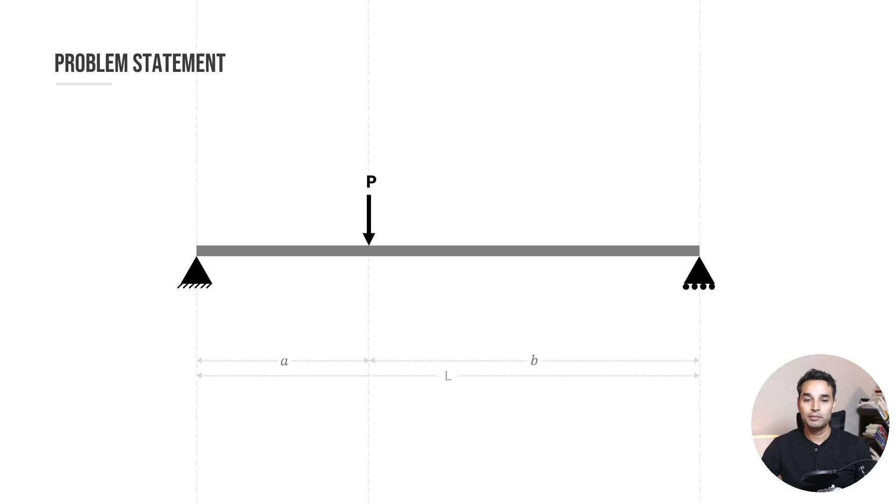So this is going to be our problem statement. We have a beam with a span length of L. We have a pin support on the left side, a roller support on the right side, and we have a point load P at a distance of A from the left side. Let's try to solve it.

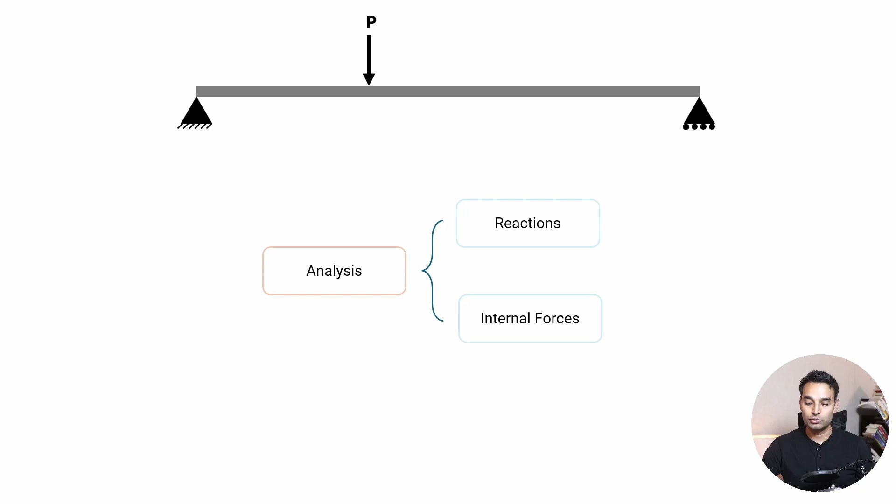So when we say we are going to be solving it, what we actually mean is that we are going to be analyzing it. And what we mean by analyzing is that we are going to be finding the reactions and the internal forces. In this case, I'm not going into the internal stresses -- that would be a separate topic. For now, we are just going into the reactions and the internal forces. And for the internal forces, we are going to be finding the shear forces and the bending moments at all the locations, which essentially is the shear force diagram and the bending moment diagram.

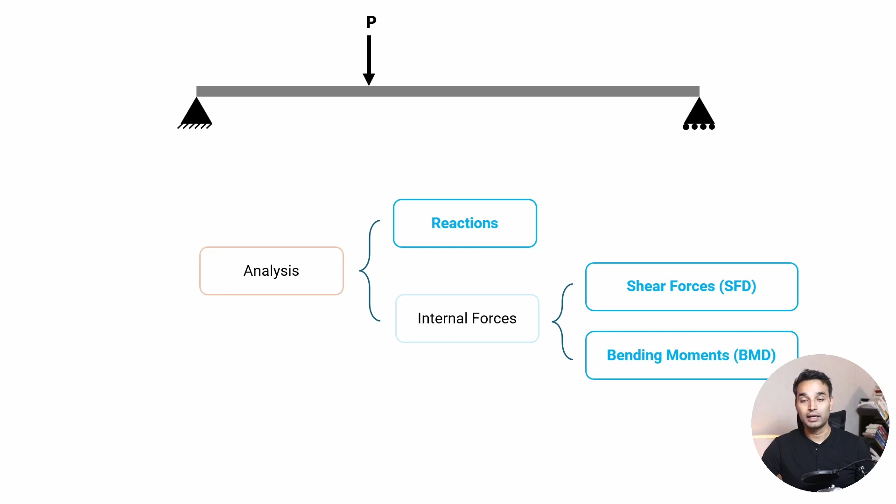Our primary focus for this video is going to be finding all these three things, that is the reactions, the shear forces, and the bending moments, and the diagrams of each. So let's start off with these.

Now, to start off with finding all these, we have to first find out the degree of statical indeterminacy, which is also called the structural redundancy. Now, this can either be 0, which would mean that it is a statically determinate structure, or it can be greater than 0, which would mean that it is a statically indeterminate structure.

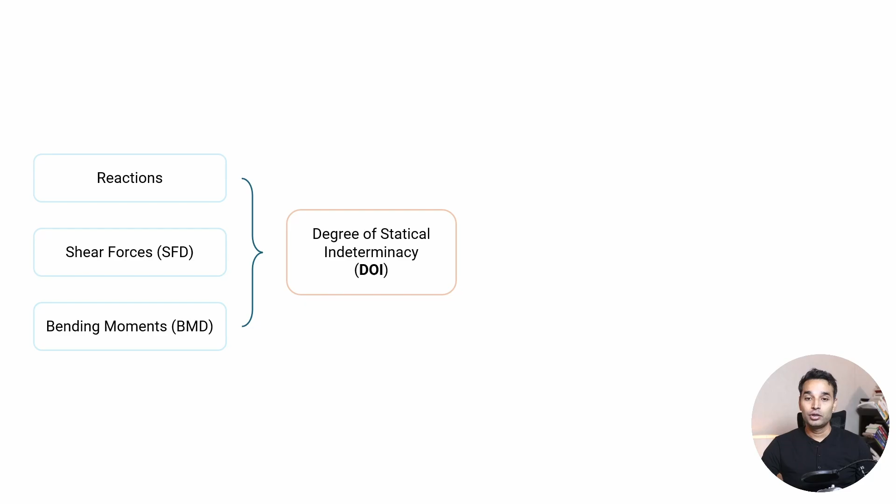To find the degree of indeterminacy, we simply have to find the unknowns and subtract knowns from it. Now, the unknowns would mean the reactions, and the knowns would mean the equations of static equilibrium. Now, this equations of static equilibrium for a beam would be dependent upon the force system.

In this case, we are assuming that it is a coplanar parallel force system. What that essentially means is that all the loading is going to be downwards and in just this y and x axis. So this z axis is gone, hence the word coplanar and parallel, because we assume that only the loads are acting downwards. Now, this is an assumption that there are going to be no inclined loads, and generally in a beam, we only consider loads which are acting from the top. If we have a frame, we would have considered loads from different directions. But in general, for a beam, we consider that the loads are acting right at the top, that is just in the negative y direction or in the positive y direction for that matter. Hence, it is called a coplanar parallel force system.

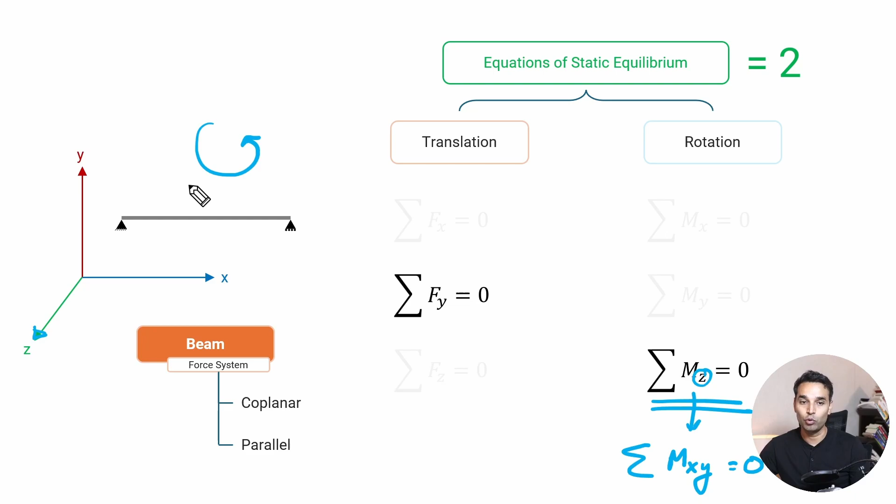Because of that, what we get is that we end up only with 2 equations of equilibrium instead of all the 6. Now, the Fy equals 0 means that the structure is static. It cannot move in this direction. Hence, all the forces in this direction, this y direction, is going to be 0. Mz being 0 means that this structure cannot rotate in this direction. So this is going to be Mz, that is pointing outward. So if you use the right hand thumb rule, we can see that this Mz is nothing but Mxy. So we are going to be finding Mxy equals 0 just for the fact that it cannot rotate along this plane. So we now have 2 equations of equilibrium.

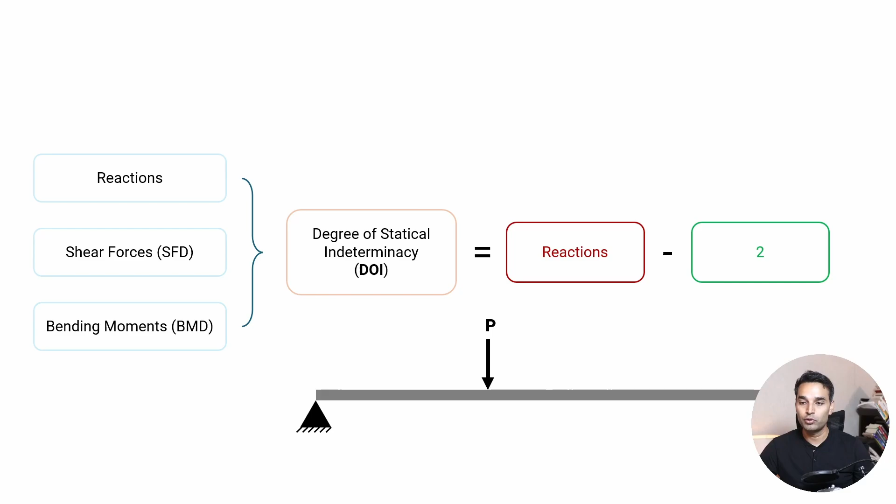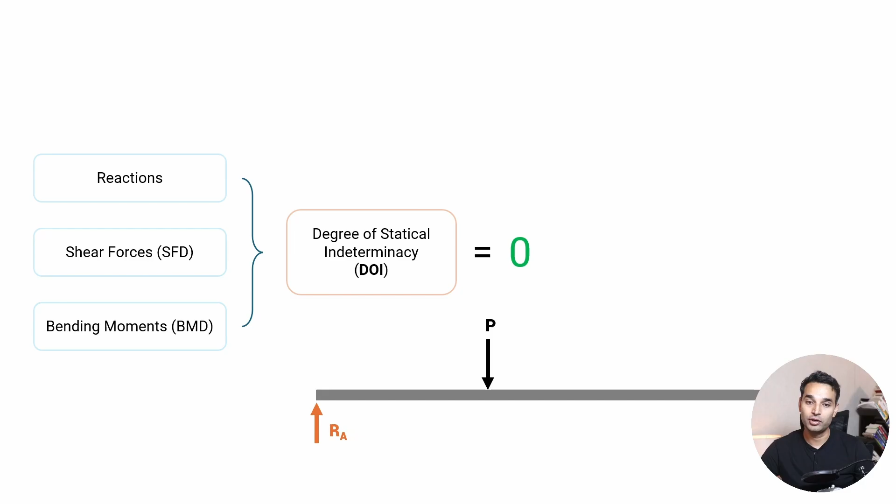Let's move ahead. So we can just fill in the equations of equilibrium. Now, for the reactions part, we can simply change the pin support and the roller support with reactions. Again, we are not going to be taking the component of this direction because we are assuming it to be a coplanar parallel force system. So in this case, we are just left with 2 reactions. So all in all, we get 2 reactions as well as 2 equations of equilibrium, thereby giving us a statical indeterminacy degree of 0, which essentially means that it is going to be a statically determinate structure.

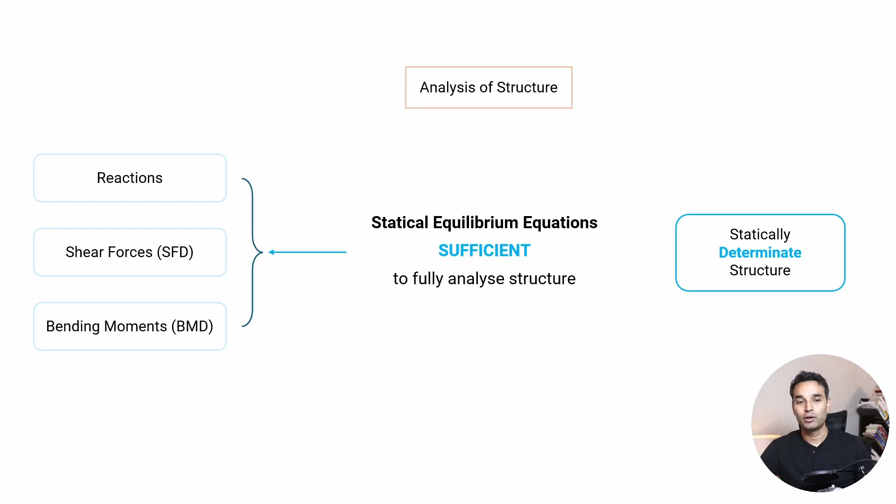Now, quickly, I'll talk about what a statically determinate structure does. For a statically determinate structure, if we are talking about the analysis of the structure, we can use just the static equilibrium equations to fully analyze the structure. This is not possible in statically indeterminate structure. Right now, we are going to be using just the equations of static equilibrium to find out everything there is to know about reactions, shear forces, and bending moments.

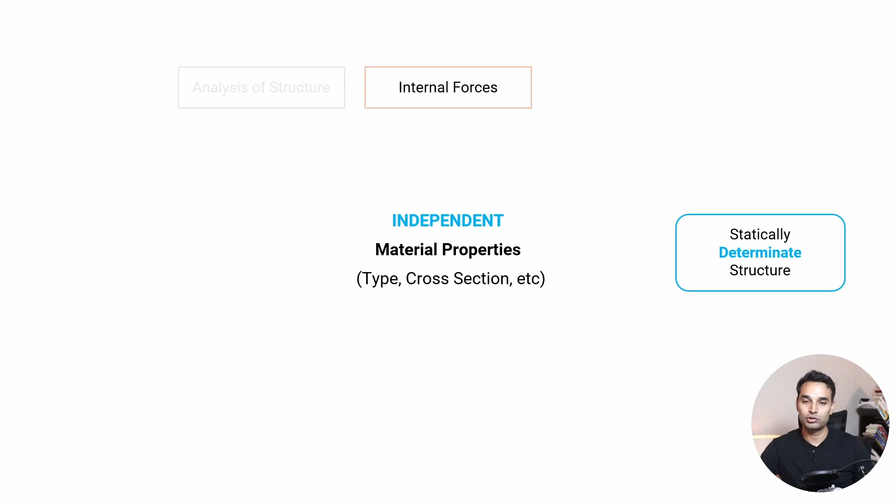Now, when it comes to the internal forces, we also know that for a statically determinate structure, the internal forces, not the stresses, are going to be independent of the material property. That is, the shear forces and bending moments which we calculate at different cross sections will be independent of the cross section or the material type itself.

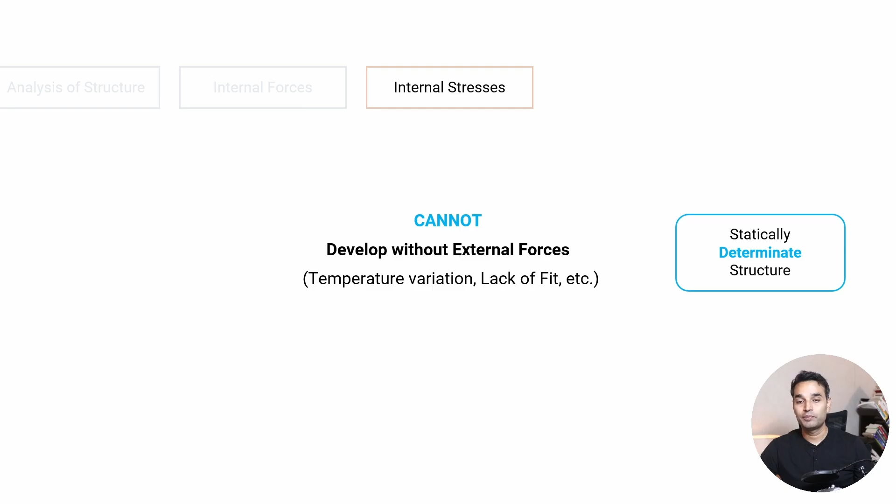Finally, for a statically determined structure, no internal stresses can be developed without having external forces, which is not the case in a statically indeterminate structure, where just due to a change of temperature, internal stresses can develop. For a determined structure, this is not the case.

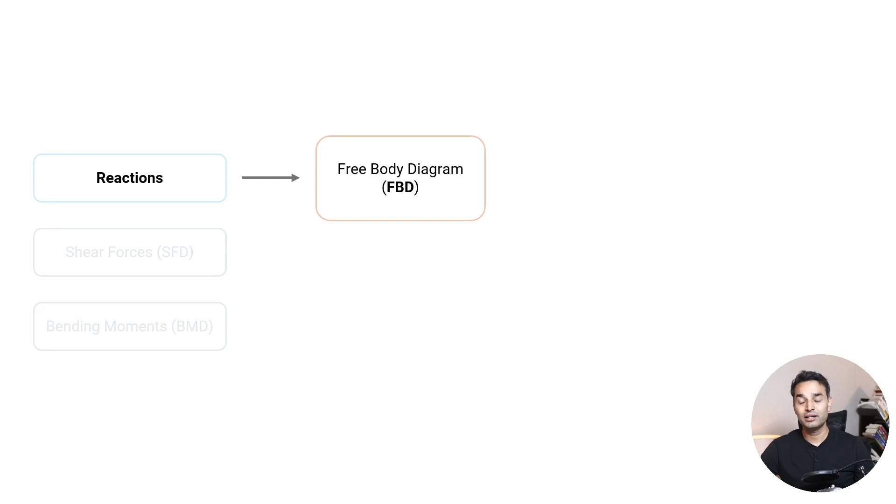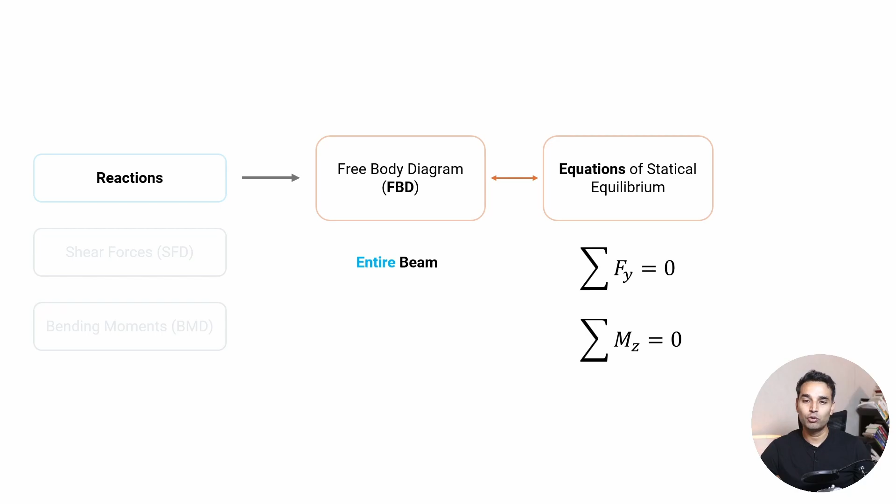So now that we know about the degree of indeterminacy, let's go ahead and start solving for the reactions. For the reactions, we'll first need a free body diagram for the entire beam. We'll also need the equations of static equilibrium, Fy and Mz equal to 0, and use these to find out the reactions for the entire beam.

So let's start off with the free body diagram. This is going to be our actual structure. We have to first convert it into a free body.

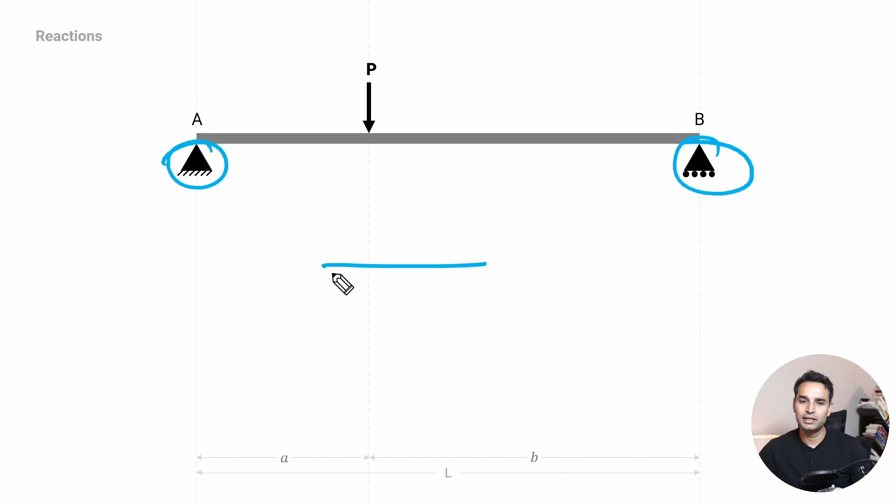What that essentially means is that we have to get rid of these supports and change it to a force system. A free body is only represented by forces at different locations, nothing of supports. So we have to get rid of the supports. Now we cannot actually get rid of the supports, but rather replace them with some kind of forces.

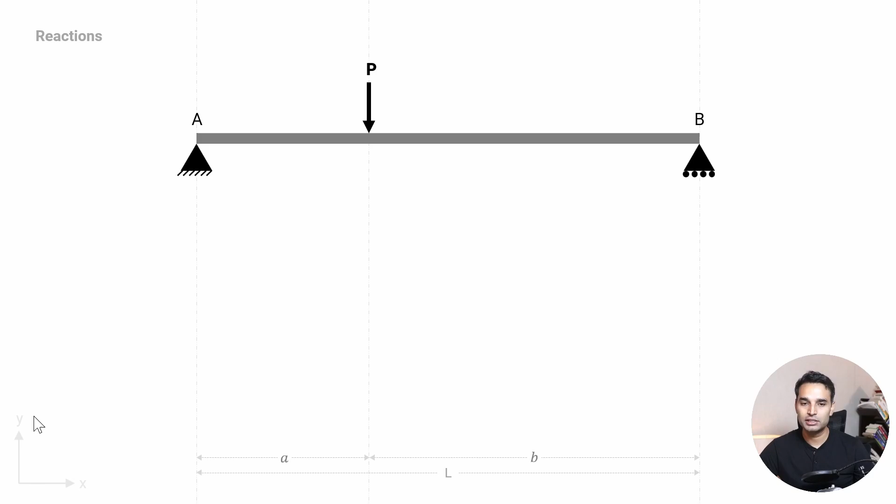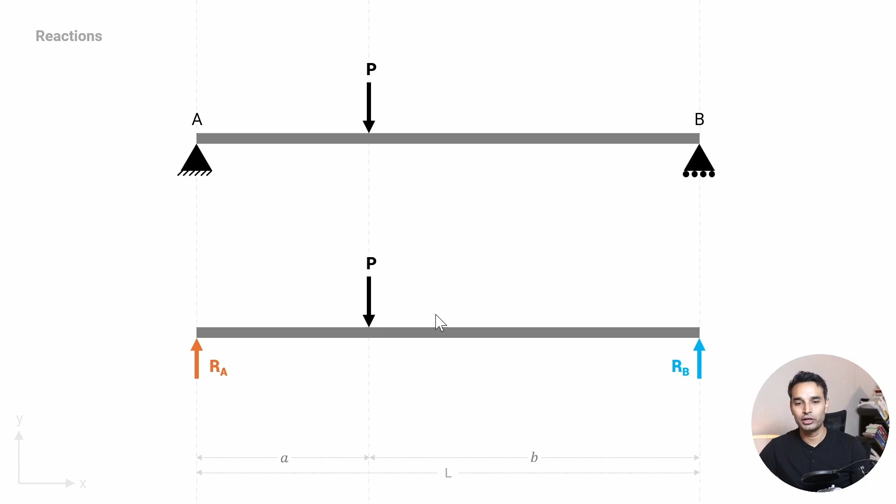In this case, the forces are going to be RA and RB. We are assuming that our left point is A and the right point is B, hence the reactions. So now this, what we are seeing right now, is the free body diagram for the entire beam.

Let's try to solve it. We'll use the first equation of equilibrium, that is sigma Fy equals to 0, which essentially means that the structure is not moving in the y direction. We have a parallel force system and a coplanar force system, so we are not moving up and down in the y direction. Hence all the forces have to come out to be 0.

So if we solve it, we get RA, which is moving upwards. We take the upward force as positive. So RA in the positive direction, RB in the positive direction, minus P pointing downwards. The summation of this is going to be 0, which essentially means RA plus RB equals to P.

Let's keep this value aside. Let's try to use the other equation of equilibrium, which is Mz equals 0. Now, when we are trying to find the Mz at any point, this should be considered at any point on the plane in xy. We did not do that for Fy.

That was just because Fy is a directional thing. Mz would be taken around a certain point. Now we can take the value of Mz at any point. So we can consider the rotation of the structure at, say, this point. This structure should not be rotating at this point.

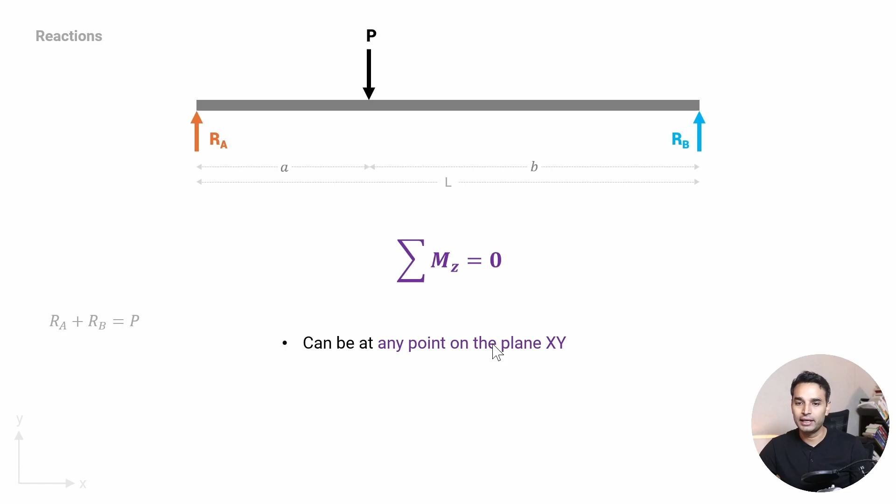The structure should not be rotating at this point. What we essentially mean is that the structure is not rotating. Now, when we talk about rotation, we talk about rotation with respect to a point. So in this case, we can take any point on the plane xy and the Mz should be 0.

Because the structure is static. Now, to make our calculations easier, we check the bending moments at support nodes, because that minimizes the calculation by one extra step. So if we are trying to find out the moment at this point, for example, we'll be using this RA value multiplied by this lever arm, this P value multiplied by this lever arm, and this RB multiplied by this lever arm.

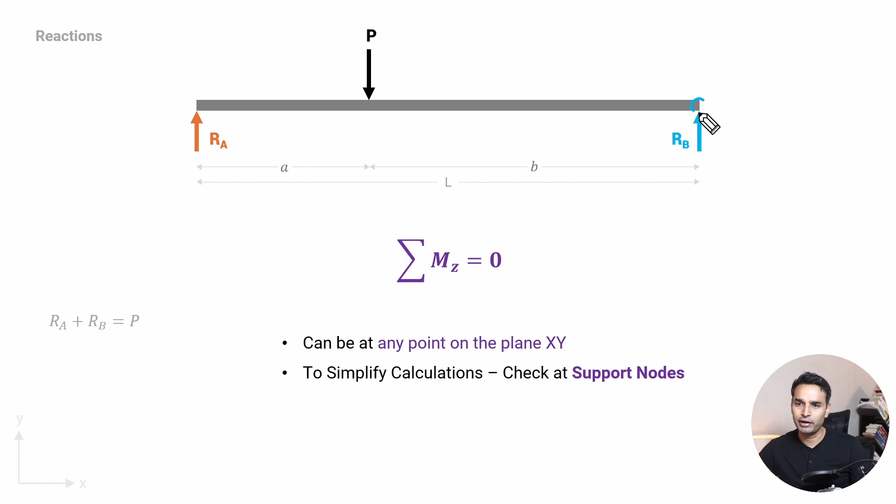However, instead, if we try to find out at one of the points, this essentially means that this point, or rather this force unknown, gets a lever arm of 0. That means this is essentially gone, and we are just left with RA and P. So that is what we'll do. We'll start off with that.

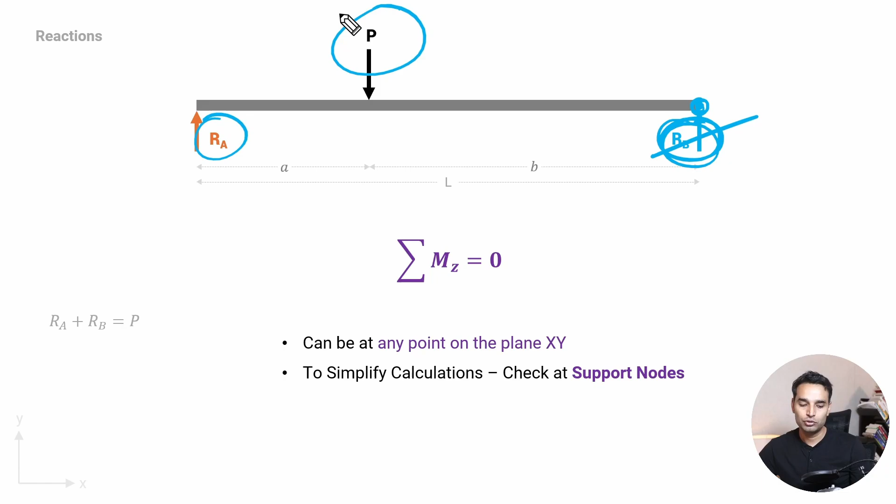So we are going to be finding it at node B, which is this node right here. Let's try to find out. So here we have RA multiplied by this lever arm, which has a lever arm of the complete L. So RA multiplied by L.

Now this is going to be in the clockwise direction, and P is going to be in the anti-clockwise direction, so P multiplied by the value of B. So what we end up getting is that RA multiplied by L equals P multiplied by B, which essentially means that RA is PB by L. Now let's keep it aside and let's use these together.

So we had the first equation as RA plus RB equals P. Let's replace RA by PB over L and solve for RB. So RB becomes P minus PB over L, which becomes PL minus PB. Taking P as common, we get L minus B, wherein L minus B is essentially the value of A. So we get RB as P multiplied by A. These are the two values we're getting: for RA, the value is P by L multiplied by B. So RA is dependent upon the value B, and RB is dependent upon the value A.

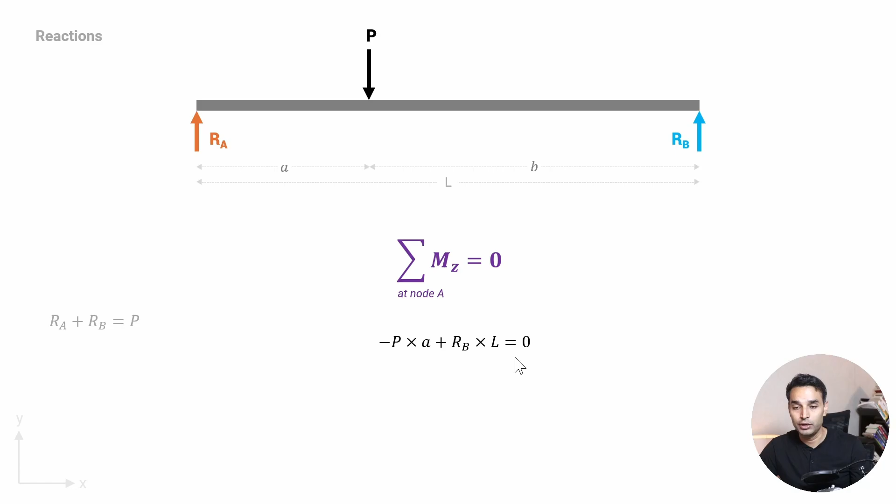Now we could have done it from the other side as well. If we try to find the Mz at node A, we'll get the same values. We have RA plus RB equal P from the static equilibrium equation Fy equals 0. Let's solve it again. For this point, we are getting P with a lever arm of A. So minus P into A, assuming clockwise is negative this time, plus RB multiplied by L, since this force acts at this point with a lever arm of L. So P into A plus RB into L gives us the RB value as P multiplied by A, or PA by L.

Again we can plug it into this equation. Let's plug in the RB value as P into A by L. All in all, we get RA equals P minus PA by L, which gives us PL minus PA. Taking P as common, we get L minus A, and in this case L minus A is going to be B. So we get the same values again. These are the three equations which we have: RA being dependent upon B, RB dependent upon A.

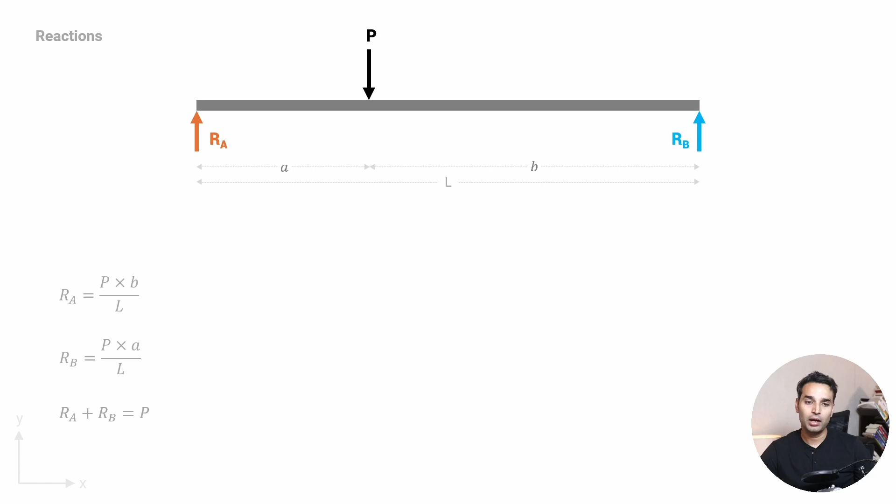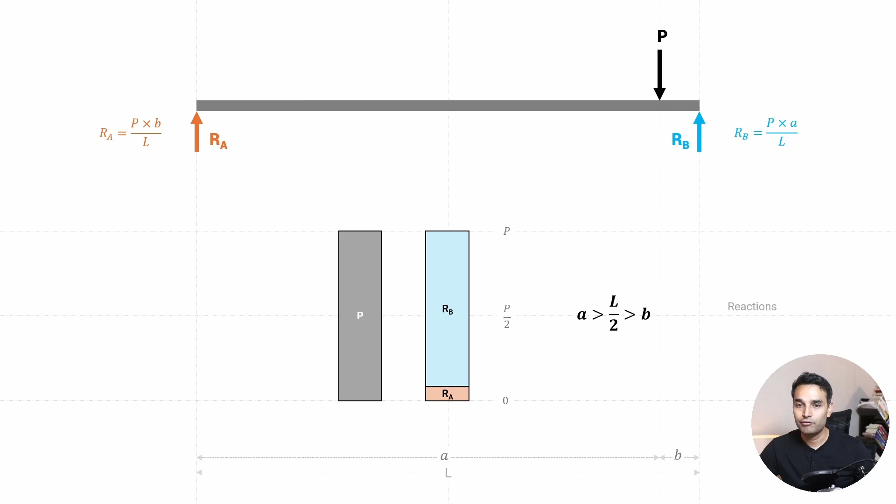Now, if we use the same concept and move P to the center, we should see that RA and RB become the same, and that's exactly what happens if A equals L by 2 and B also equals L by 2. If you move it to the extreme left, you'll see RA rises because of this effect of P moving toward RA, while RB decreases. Moving to the other side, we see the same thing, but this time RB increases and RA decreases substantially. For our simple case, we have this as the value of reactions.

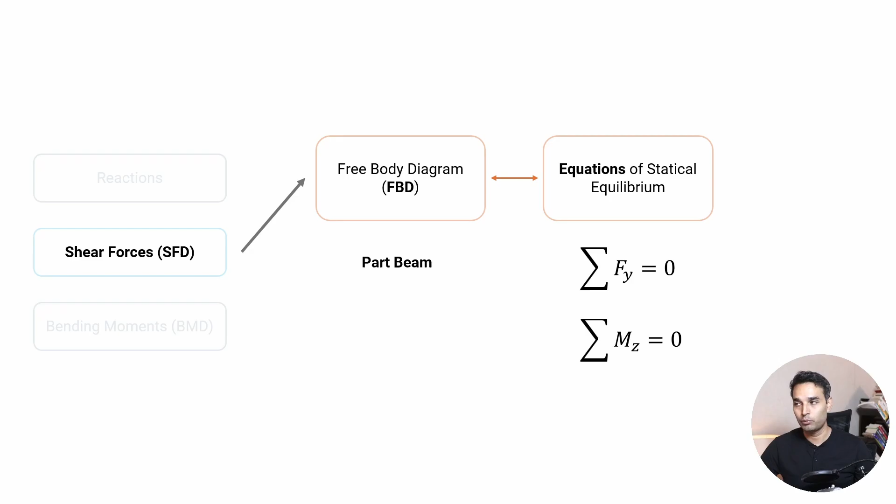Now that we're done with reactions, let's move on to shear forces. What we're trying to do in shear forces is find them at all locations inside the beam, which means for a free body diagram we have to take a part of the beam. Again we'll use the same equations of static equilibrium, Fy equals 0 and sigma Mz equals 0. We're trying to find the shear forces at all locations, but rather than doing that for every single location, we'll try to find the curve for a specific area and plot the shear force diagram, which will give us the values at all points. So let's start off with that. Again, we have the same free body.

Now, this is going to be the free body of the entire beam. Let's break it down because we need to go inside the structure to find out the internal forces, which are the shear forces and the bending moment.

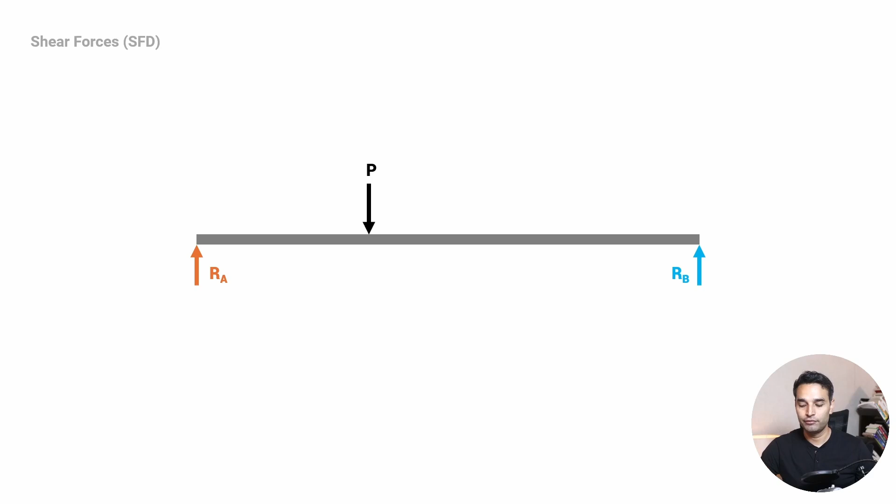Now, in this case, we can use the free body at any point. So we can use a free body, which is just this much. So we can just cut it right here. And if we cut a beam at any location, there are going to be some internal forces which are there.

Now, these values can be 0, these values can be greater than 0, plus, minus, whatever the case is. But in essence, there are going to be these values because, again, my sigma mz equals 0 and sigma fy equals 0 has to work.

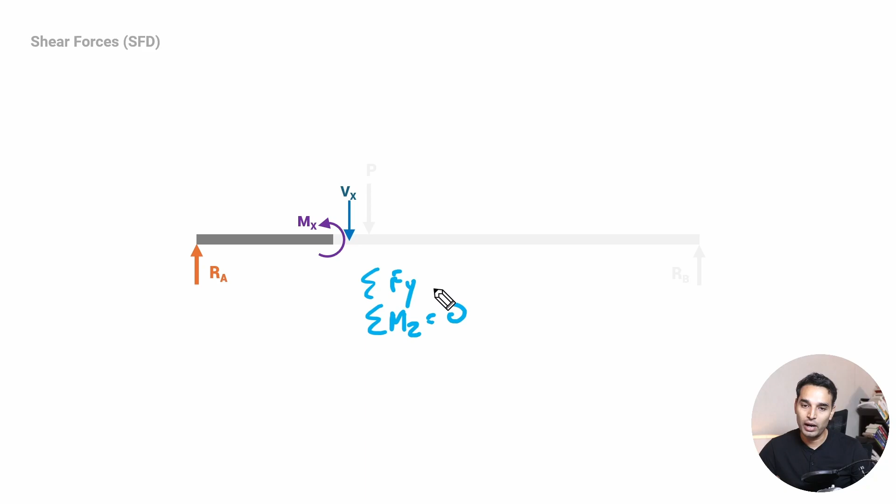Again, that is because if my entire beam is in equilibrium, my part of the beam will be also in equilibrium. So just cutting a beam and not creating internal forces means that there is only one force acting on it, and this can essentially go upwards, which is not the case. And to minimize that, we have to have some kind of forces and some kind of bending moment so that this value does not turn and move.

So we can take a free body diagram something like this. We can take it something like this as well. But if we take it like this, P value also gets involved. We can take it from the other side as well. We can take it beyond P, or we can take it something like this, where we are just talking about the internal forces. Now, in general, we should try to minimize the forces when we are calculating it.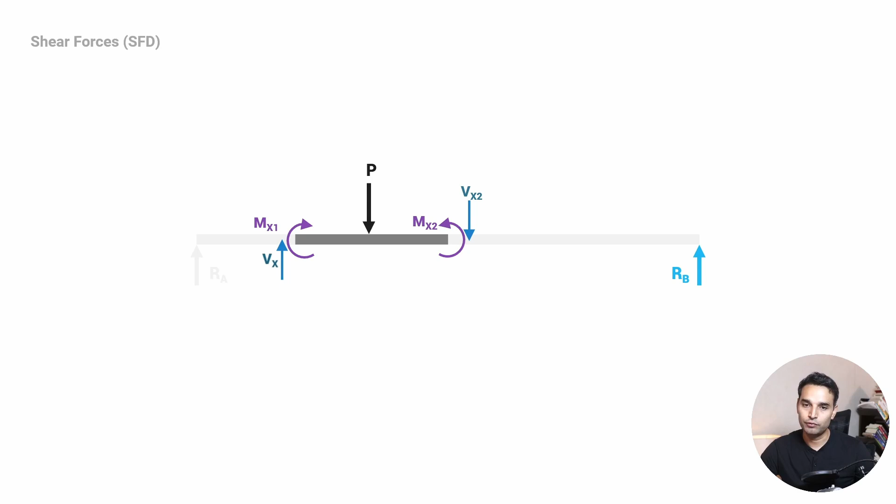So from the calculation point of view, we'll start off with something like this, where we are just working with RA and MX and VX, and we'll move on from there. So let's use this, and we'll just be focusing on the shear force right now.

So the value of VX essentially means that we are playing with the shear forces or the free body diagram from right here all the way up to this point here. That is, the X value is going to be right from 0 up to the value of A. So up to here. So we are starting from here and we are moving this way.

Now we are going to be trying to find out the shear forces with respect to this value x, thereby giving us a diagram, thereby giving us the values at all locations in a way. So let's start off. Again, we are going to be using the equations of static equilibrium, Fy equals 0, which gives us a value of Ra in the positive direction, Vx in the negative direction, thereby giving us Vx value as Ra.

Now we knew Ra, which was our Pb by L, so we get the value of Vx as Pb by L. Now in this case, if you are going to be plotting it with respect to this point right here where x was 0 and at the point A, you'll see that nothing really changes because this value of Vx is not dependent upon x itself. So what we get at x equals to 0 and x equals to A is the same thing as Pb by L and Pb by L. In this case, the graph or the curve is going to be a constant.

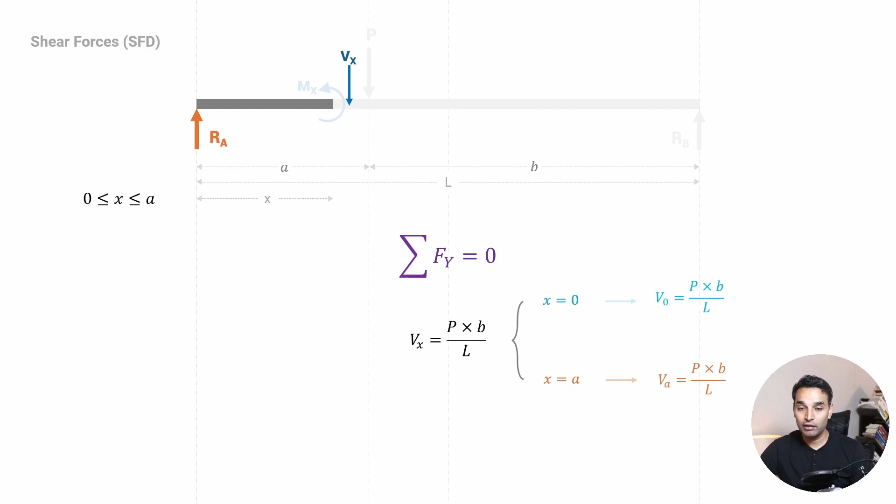Let's take all these values and put it aside. So let's find out the shear forces at the other locations. So for that, we'll be using this free body diagram.

In this free body diagram, what we are doing is that we are increasing x from this side. So x is moving from 0, that is right at the point here, up to b, that is right at the point here. That is what we are considering. Again, we'll be using the equations of equilibrium.

Now we are using this free body diagram just because of the fact that, again, we are going to be working with only RB as the known and only Vx as the unknown, and we are not going to be dealing with the other p values because we do not want to make our calculations more difficult.

So let's start off. Again, we get the value of Fy as Vx plus Rb equals 0. Again, if you're confused about the sign conventions of shear forces and the bending moments, do leave a comment down below. I'll make an entire video on it.

Simply put, shear force, if for the left part of the portion is going up and the right part of the portion beam is going down, it is considered as positive. That is why we have taken Vx as pointing upwards as positive. So we get a value of Vx plus Rb, that is this value Vx right here, and this force Rb right here, both going upwards as positive.

So we get a value of Vx as negative Rb, which gives us a value of Vx as minus Pa by L.

Again, this is not dependent upon the x value. Hence, for x equals 0, the rightmost point, and x equals b, we get the same values: Pa by L and Pa by L in the negative direction. The slope is constant because these values are not dependent upon the position x. Let's keep this aside and try to plot it.

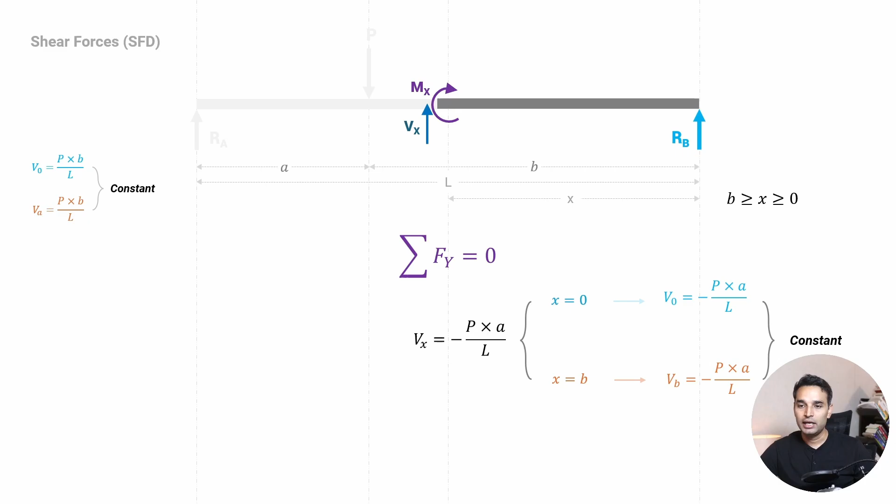We'll quickly create a few lines. These lines will represent the values of shear forces at 0, P by 2, and P, again in the negative direction, minus P by 2 and minus P.

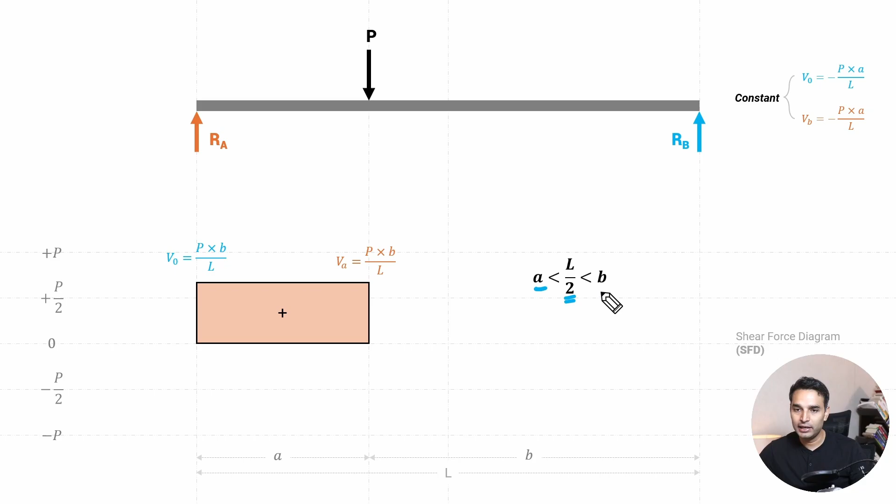For the left portion, up to A, we can plot a diagram that looks like this. The values start from 0, but for the entire portion up to A, the value is constant at Pb by L. So from here up to this point, we get a value of Pb by L. We get this value slightly greater than P by 2, just because A is slightly less than L by 2 and B is slightly greater than L by 2. For the right side we saw negative values, so it will look something like this.

P multiplied by A by L, and P multiplied by A by L. In this case, A is less than L by 2, that is why we are getting shear forces less than P by 2. So this is the graph that we are getting.

Now, if this load P were to move right to the center, everything comes into a kind of equilibrium, that is, equality. So we get the values of VA for this portion as P into B by L, which gives P into L by 2 divided by L. This goes away, and we get a value of P by 2. The same thing happens on the other side, so exactly at the center, the shear forces are P by 2 and minus P by 2.

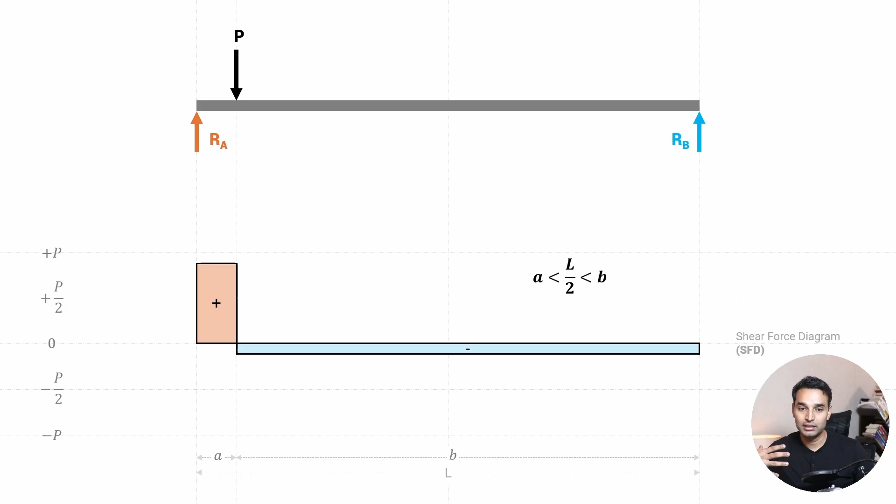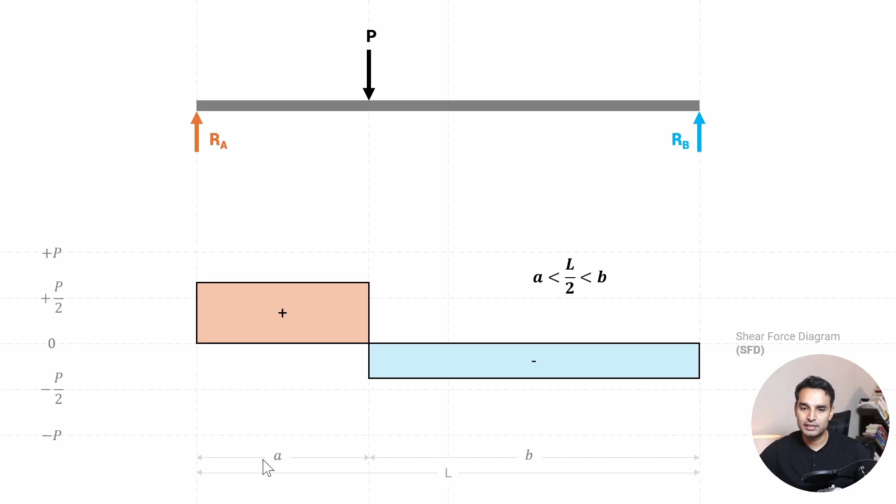Now if you were to take this load P at the extreme left, we'd see a major increase in the V value for this portion. Similarly, for the right side, we'd see an increase for the B portion. Bringing it back to our original general case, where this is A and this is B, this was the shear force diagram and the shear forces at all locations.

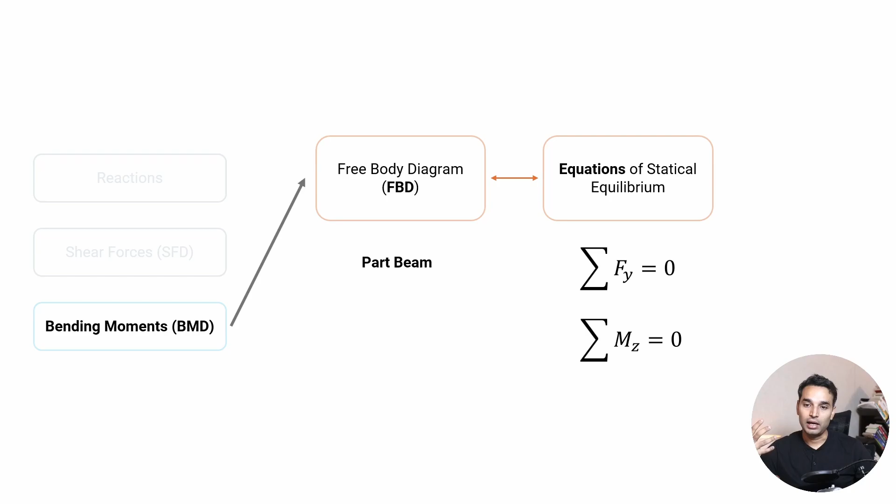Let's move on to the bending moment diagram. We'll use almost the same approach, using the free body diagram and the equations of equilibrium combined to find our results. We'll start off with the same free body, but this time we'll also be working with mx.

Let's directly jump into the mz value at 0. Ideally, we can use mz at any point inside this plane, but we should use it at a point where we need the minimum number of equations. That point is at x right here. If we use it at this point x, the Vx lever arm goes away, so Vx is out of the calculation. That's why we've chosen the node x.

For the node x, we get Ra multiplied by this lever arm, which is x itself, minus mx. In this case it is minus, just because our sign convention works that way for hogging and sagging bending moments. If you have confusions, leave a comment about the sign convention and I'll make a video on it. This gives us an mx value of Ra multiplied by x, which ultimately gives Pb multiplied by x by L. So this is the value we get.

Now in this case, you can see it is dependent upon the x value, so at x equals 0 and x equals a, we get different values. At x equals 0, the entire equation goes away, giving us an m0 value of 0. At x equals a, we get a value of P multiplied by a multiplied by b divided by L. Since we're dependent on the first degree of x, this is going to be a linear curve, and we'll plot it that way.

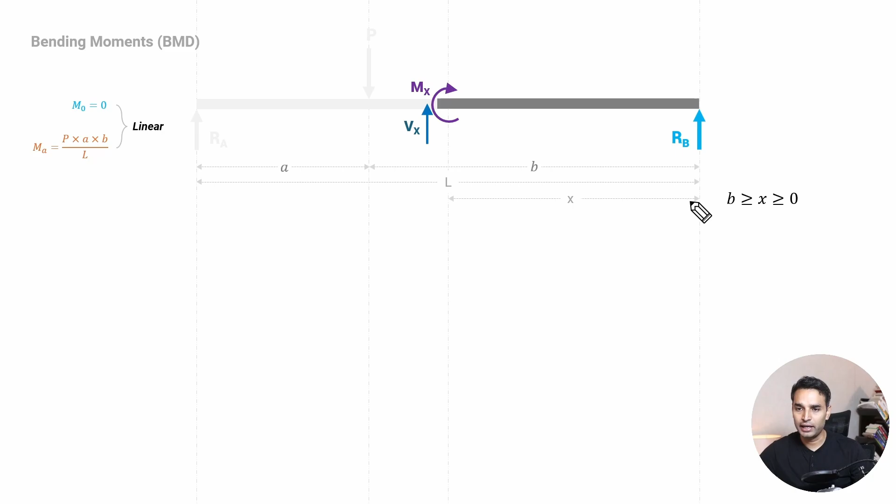Let's keep this thing aside and look at the other way. In this case, we are again considering our x values starting right from here and moving this way.

So this is going to be our x from 0 up to a value of b. Let's start with mz equals 0. Again, we are taking it at this node so that we get rid of this Vx value and don't have to consider it. If we had considered it at some other point, we'd have to use Vx too.

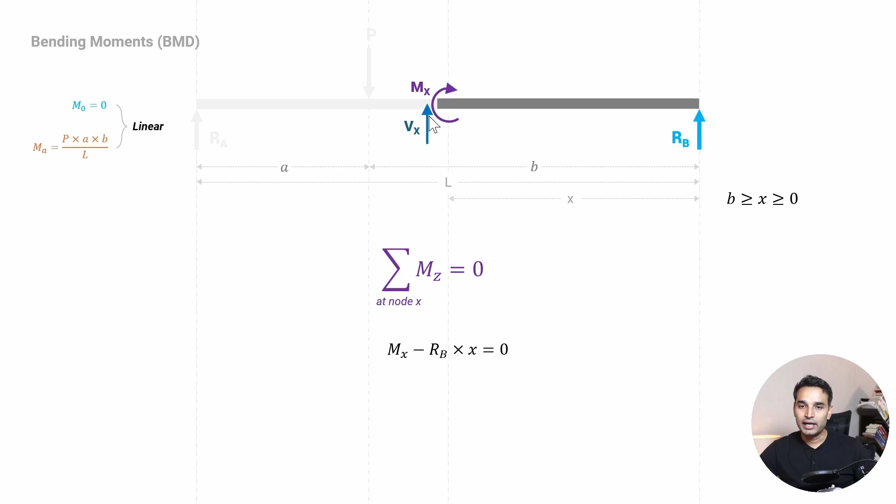So in this case, we get mx minus rb into x equals 0. We get mx as rbx, which is pax by L. Again, this is dependent upon the value of x. So for x equals 0, at this point, the value is going to be 0. However, at x equals b, we again get the same value. This is going to be a linear curve because it is dependent upon x.

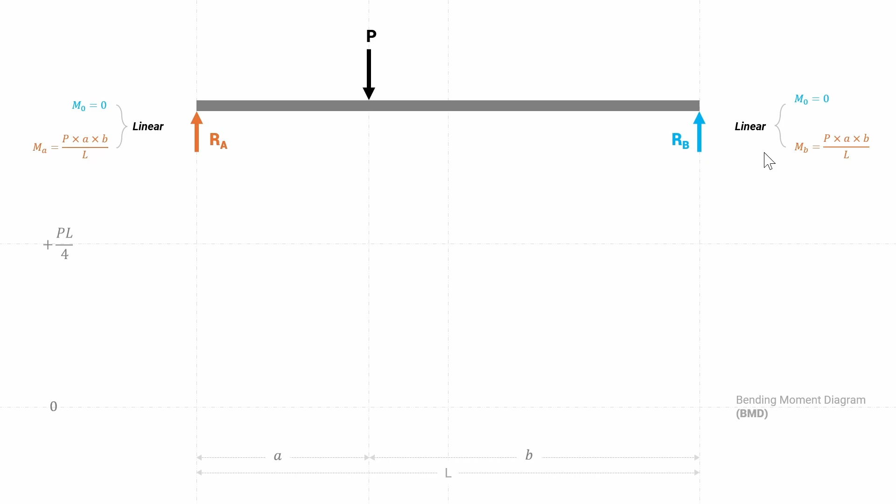So let's plot this on the graph. We'll quickly create our entire beam, create a value of AB, and plot it. For the left side, we have a value of 0. At point A, on this line, we get a value of PAB by L. Similarly, for the B side, moving from this side, we also get the same value. If we plot it, we get a triangle, where the left side is 0, the right side is 0, and this value PAB by L is the same. Now, it is skewed slightly to the left and downwards because A is less than L by 2, which is less than B.

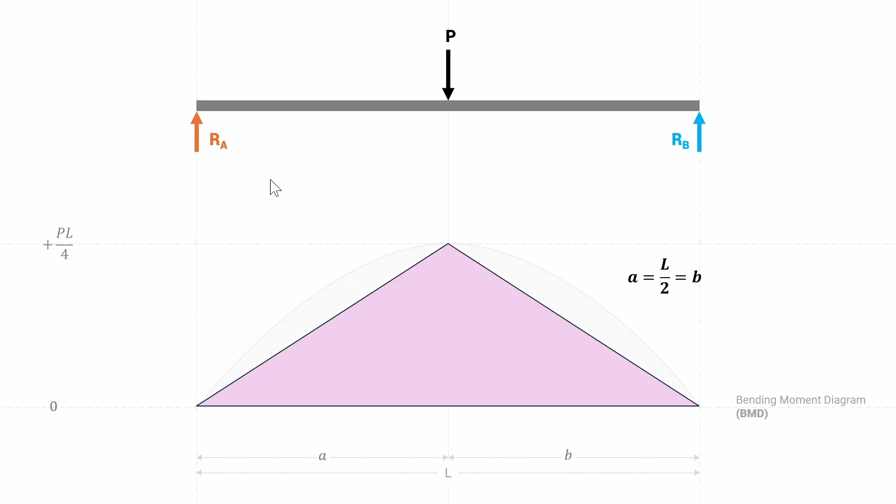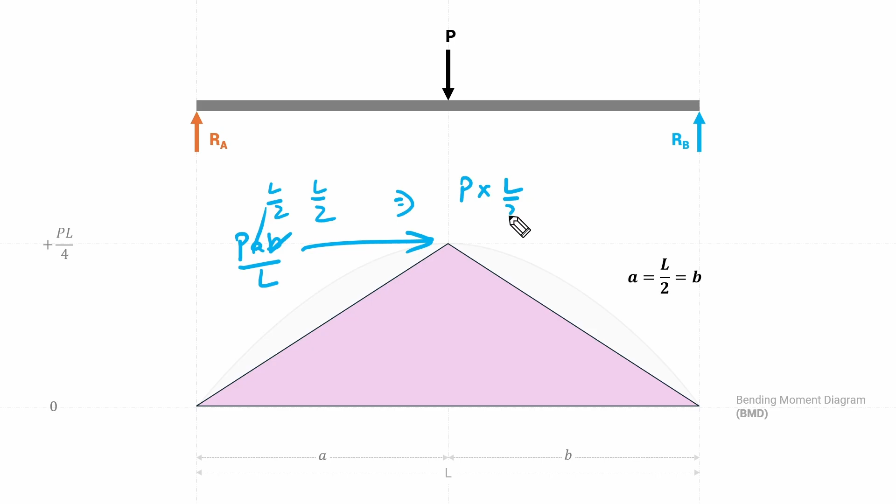Now this graph falls on a parabolic curve. That means if we change the value of P, it will move along this parabolic curve. If we bring P to the center, it will move to the center of this curve, where we get a value of PAB by L. If A equals L by 2 and B equals L by 2, we're left with P into L by 2 into L by 2, divided by L. So we get a value of PL by 4, and that's what we're seeing right here.

Now if we move it to the left, it will again fall on this parabolic curve, because it's dependent upon both A and B, giving us a quadratic equation. If you want to know more about why this curve is parabolic, leave a comment below and I'll make a video explaining it. If you move this load to the right side, we get a curve like this. The values will decrease or increase depending on where it's located. For our general case, this is where we have it.

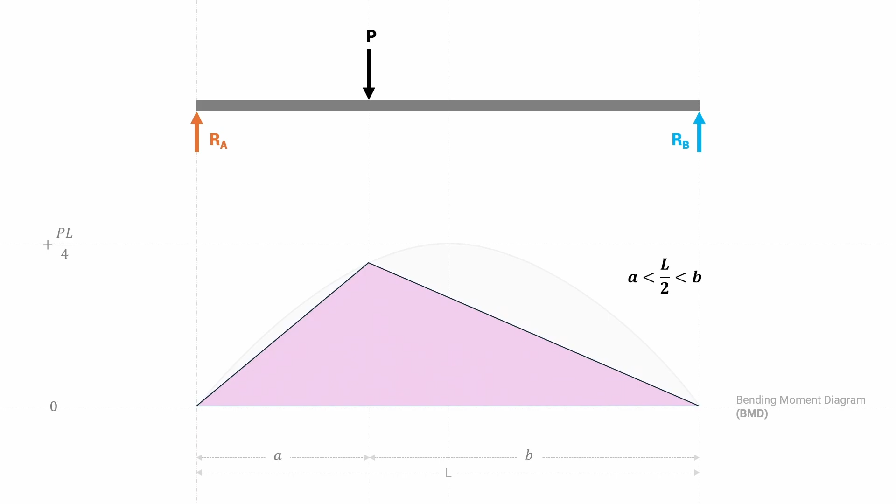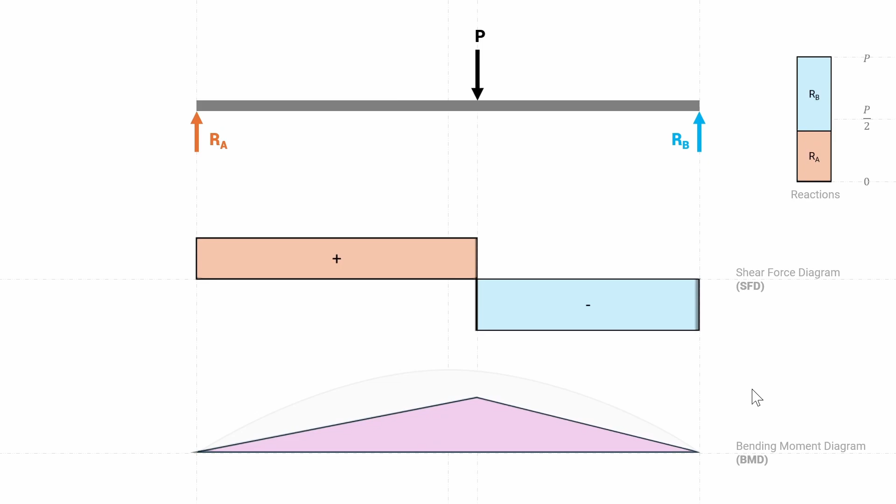For a load acting at P, slightly to the left of the half portion, we'll get an RA value greater than RB, because RA was dependent upon B and RB was dependent upon A. Similarly, the shear forces depend on RA and RB, so these values change accordingly. If we bring it to the center, everything comes into equilibrium - RA becomes RB, the shear forces become equal, and this value becomes PL by 4 at the center. If you move it left, RA increases, shear force increases, and bending moment decreases - it will lie on this parabolic curve. To the right, we get this value, and in our general case, we get this value.

So now you know how a simply supported beam behaves with a point load on it - where the shear forces will be, what the bending moments will be, what the reactions will be, and how those values change with respect to the position of P itself.